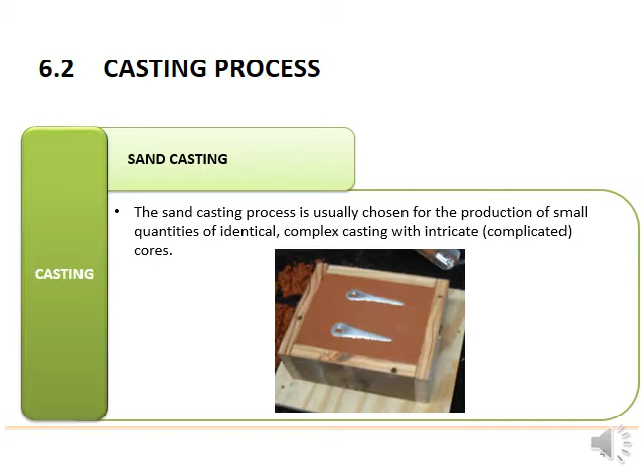Okay, untuk sand casting, the casting process is usually chosen for the production of small quantities of identical complex casting with intricate. So, maksudnya produk yang kita hasilkan biasanya identical and then sangat complicated.

Okay, sand casting, a mold is made by compressing the casting sand, and then casting sand is made from the combination of silica and bentonite.

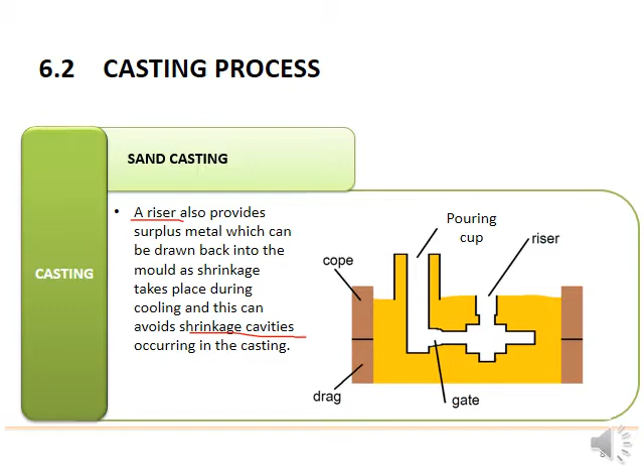Okay, the pattern has to be made oversized to allow for shrinkage of metal as it cools and it has called the shrinkage allowance. Ni yang saya katakan tadi.

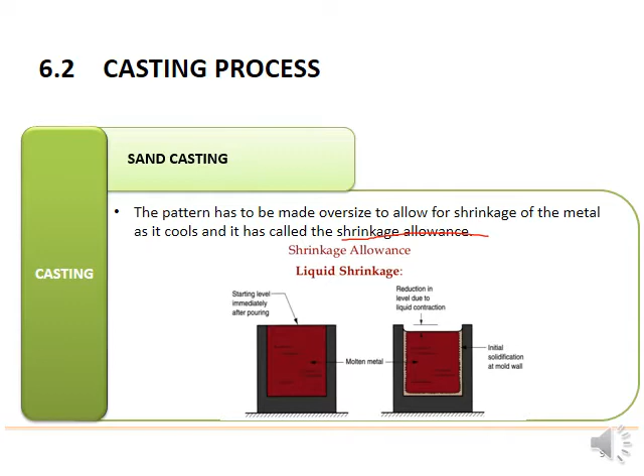Okay, first of all, on a clean floor, we will set the inverted drag box. Then we will place the pattern inside the box and pour the sand into the box. After that, sand is rammed and leveled off.

The packed drag box is then turned over and cope box is placed over it. After that, second half of the pattern is placed exactly over the first half of pattern. Then the sand is filled and rammed tightly. Now two boxes are opened and pattern is removed with the help of screws.

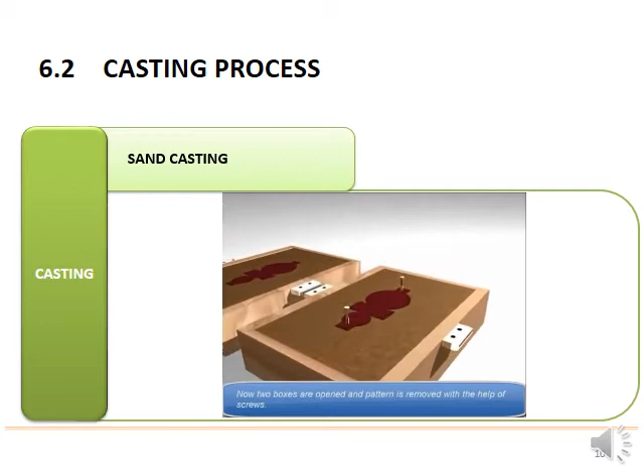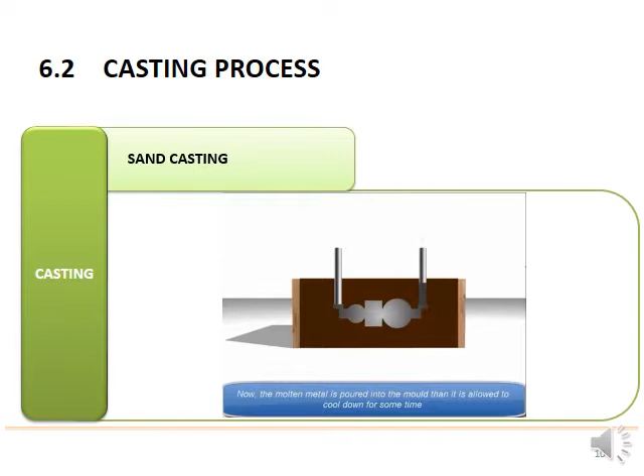Boxes are again put back into position and clamped with the rivets to prevent upper box floating. Gates and sprues are formed to pour the metal. Now the molten metal is poured into the mold. Then it is allowed to cool down for some time. After cooling, the final cast is

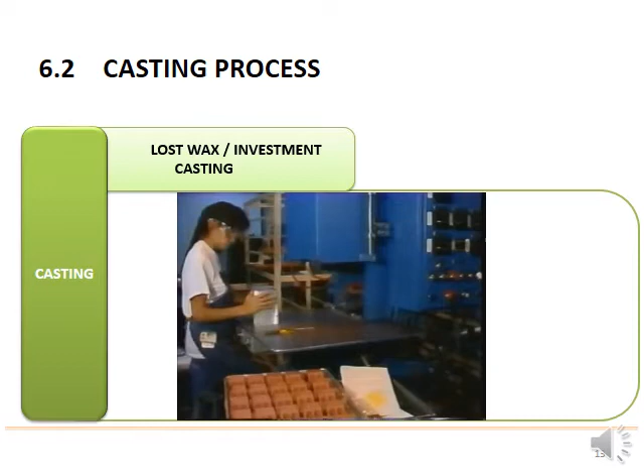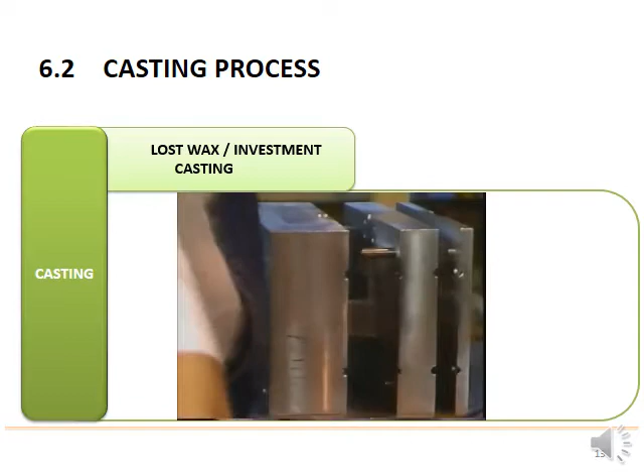To begin the process, wax patterns are made by injecting molten wax into an aluminum die to make an exact replica of the part. Wax injection presses make larger, high volume and more complex parts feasible. Laser technology and plastic patterns are an attractive alternative for some investment casting applications. In the next step of the process, the patterns are assembled with great care on a post or sprue, which is in turn fastened to a pouring cup.

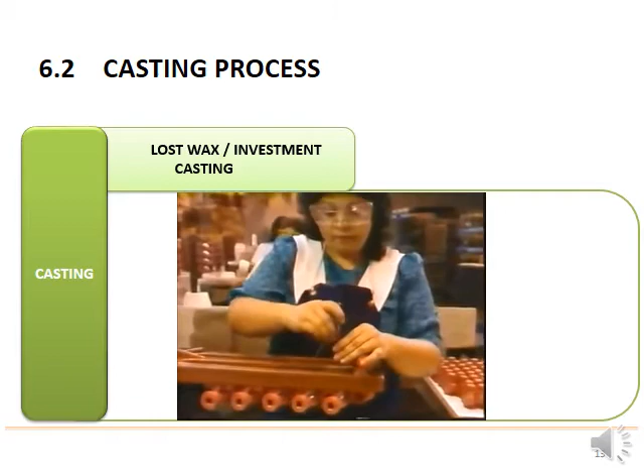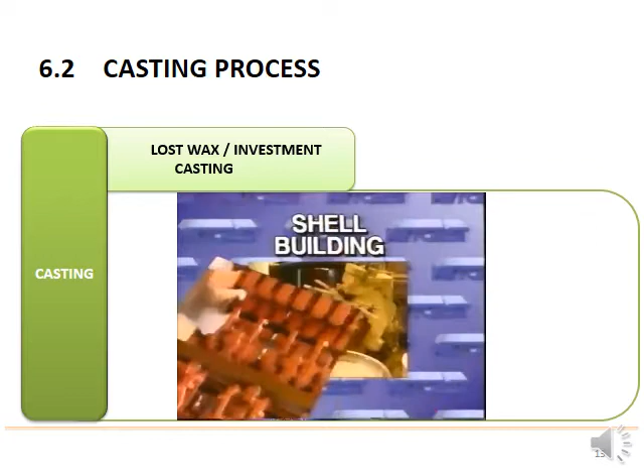Attention to detail is critical if the molten metal is to find its way into each detail of the mold. Assembly room temperature and humidity are carefully controlled to guarantee that the pattern retains dimensional stability. Complex runner systems are required in many cases to provide the gating or metal flow channels in the mold. The completed assembly is then processed to produce a ceramic shell mold. This is accomplished in several stages.

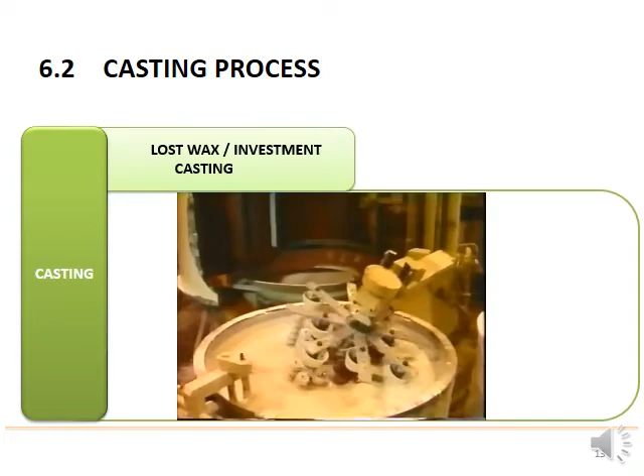First, the wax assembly is dipped into a cleaning or etch bath and then pre-wet before it is dipped into the first coating of slurry. This is a critical step in the process, for the operator must produce an almost flawless coating upon which to build the shell. The assembly is carefully examined and any bubbles in the coating are burst with an airstream.

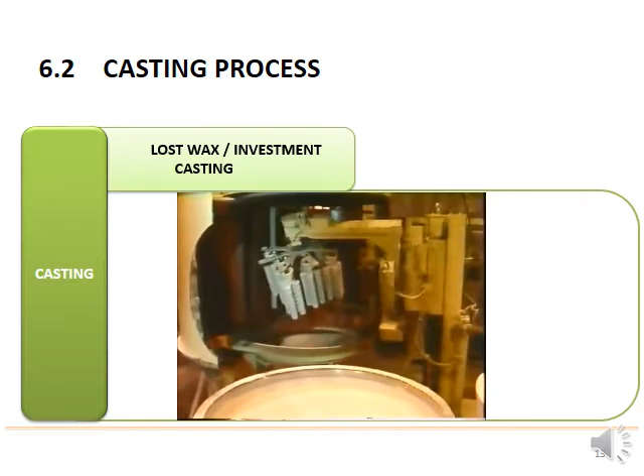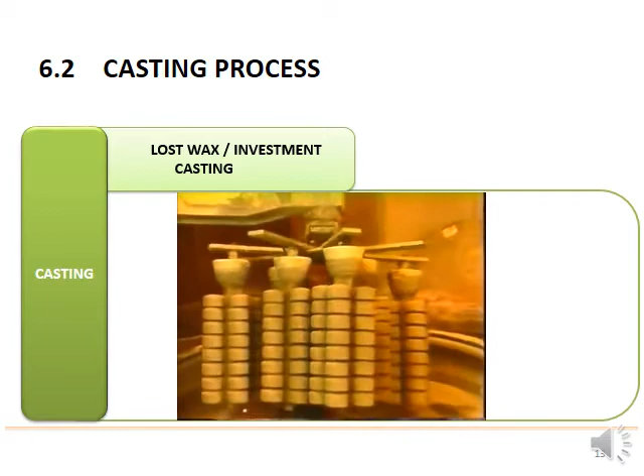The wet assembly is then inserted into either a fluidized sand bed or a rainfall sander, where the sand particles adhere to the wet surface. Care must be taken to make sure that every detail of the assembly has been properly coated. The assembly is then placed on a rack to be dried under carefully controlled conditions. Additional coats of progressively coarser grades of material are then applied to the assembly. Finally, the desired shell thickness is achieved.

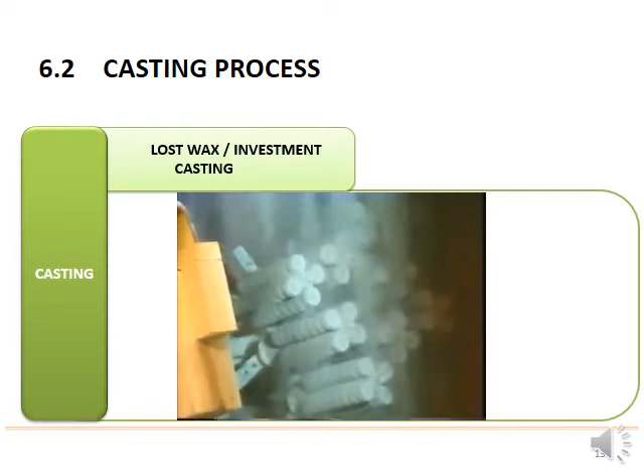The shell production process lends itself very well to automation. Robots have been developed to carry out the shell build-up sequences. Such equipment is programmed to follow the normal hand-dipping procedures to reduce labor costs and to remove variables of a manual operation.

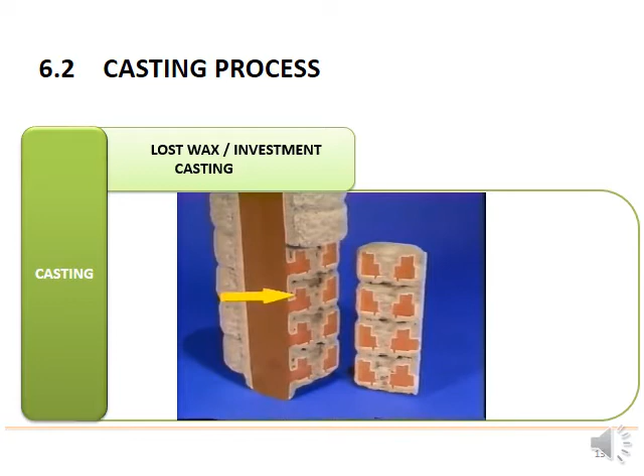If we take a typical assembly and section it, we can see how the ceramic coating faithfully follows the contours of the wax patterns. And when the wax is melted out, a precise cavity remains into which metal may be poured. The next step in the casting process is to remove the wax and fill the mold with hot metal.

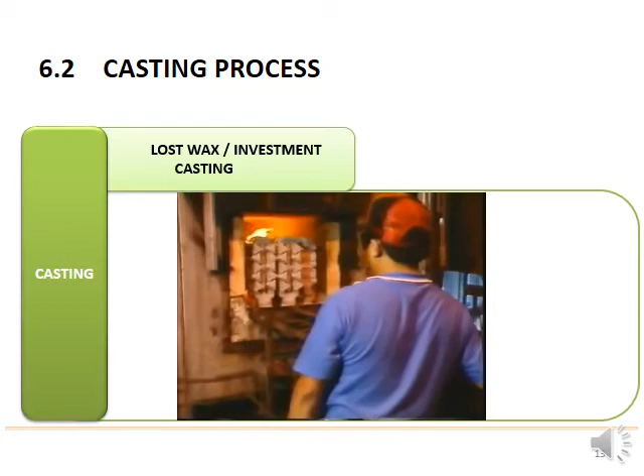The removal of the wax is usually a two-step process. First, the major portion of the wax is removed in a steam autoclave. Next, the shell is placed into an oven where the last remaining wax is burned out and the ceramic shell fired. The metal, which has been melted in an induction furnace, is poured into a transfer ladle. It is then poured into the preheated shells and allowed to cool.

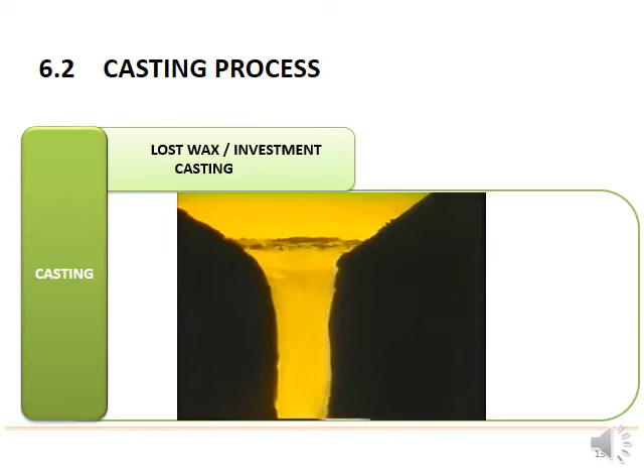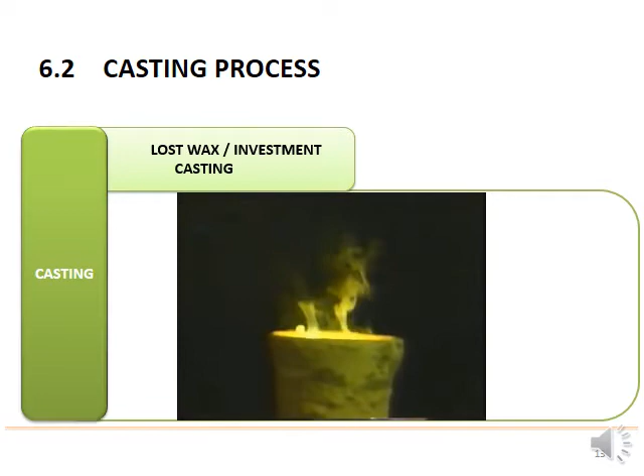Different types and sizes of ladles are used, depending upon the size of the part to be cast and the alloy being poured. In some cases, the shells are placed into fluidized sand beds for pouring. Light alloys are generally handled quite differently. When the metal has reached the right temperature, substantially lower than in the case of ferrous metals, it is usually placed in a special chamber and poured in a vacuum.

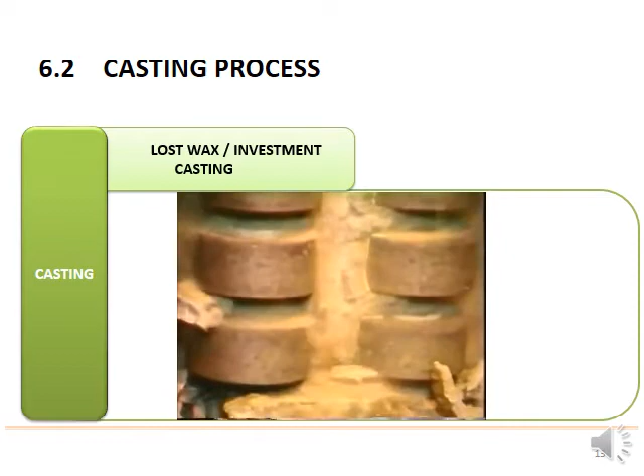The last stage of the process is to remove the shell from the newly formed cast. After the molten metal is cooled, the ceramic shell is removed either by vibratory methods or with high-pressure water jets. In some cases, the remaining shell material is removed in a blasting cabinet, with the resulting casting assembly looking exactly like the wax assembly previously seen.

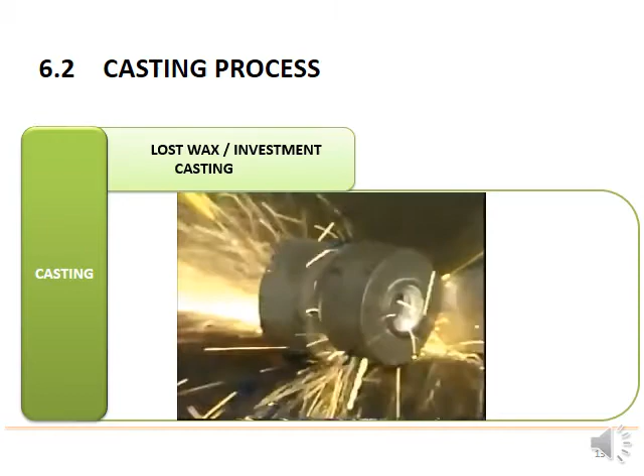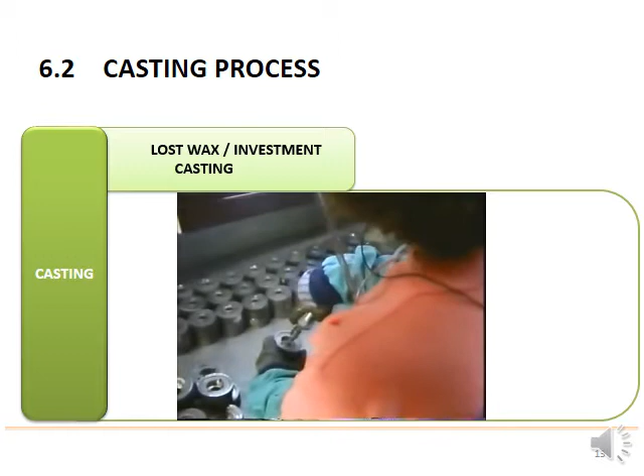The individual castings are removed from the assembly through the use of high-speed cutoff wheels and then cleaned in a salt bath. The gates are removed by grinding, and final cleaning is done in a variety of finishing machines. A minimum amount of hand finishing is required when parts are properly cast.

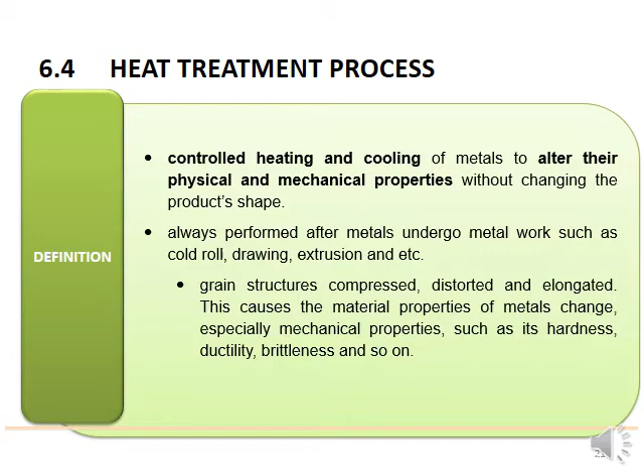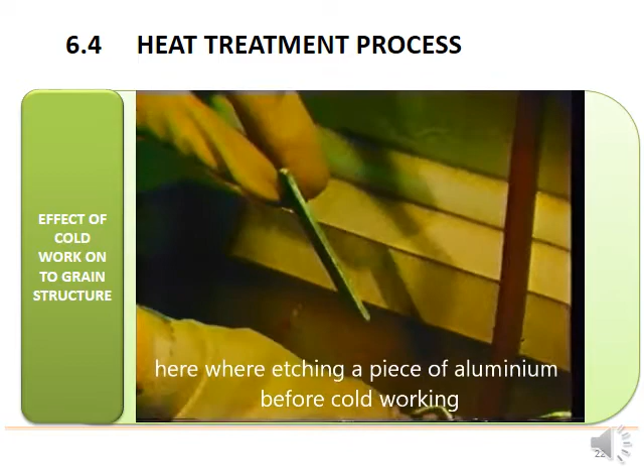Here we're etching a piece of aluminium before cold working. At this stage, the grains are all approximately the same size and the same shape. Remember, they appear different shades only because of the way they reflect the light.

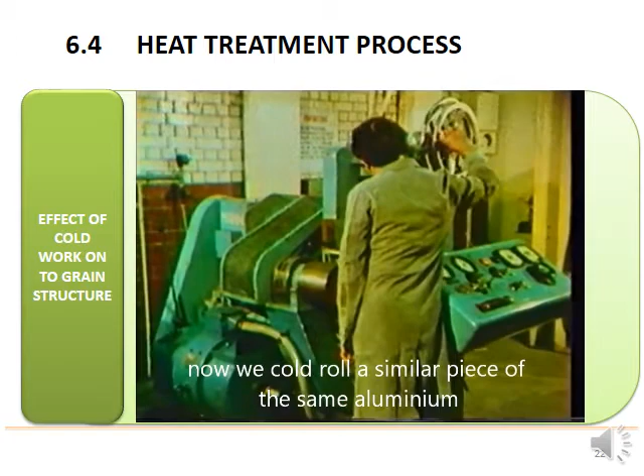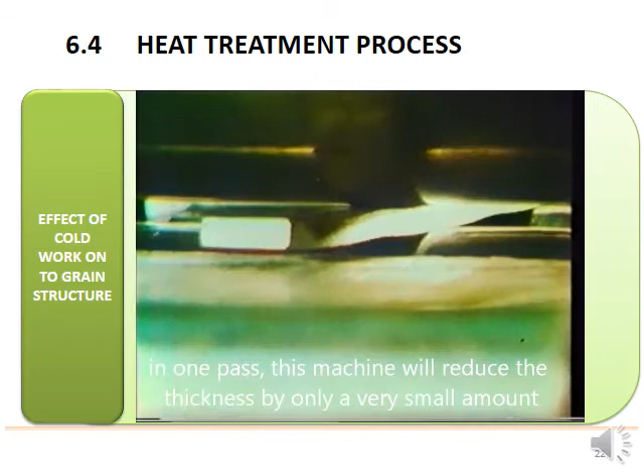Now we'll cold roll a similar piece of the same aluminium. In one pass, this machine will reduce the thickness by only a very small amount. So we'll reduce the gap between the rollers and put the metal through again.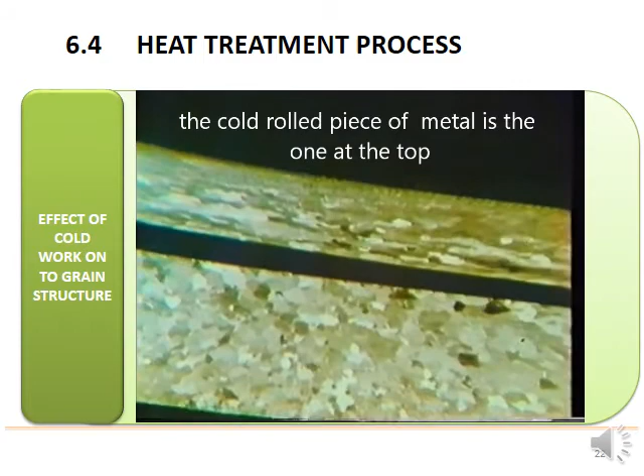Right, let's see what that's done to the grain structure. The cold rolled piece of metal is the one at the top. Can you see the difference? We seem to have changed the shape of the grains - they've become elongated.

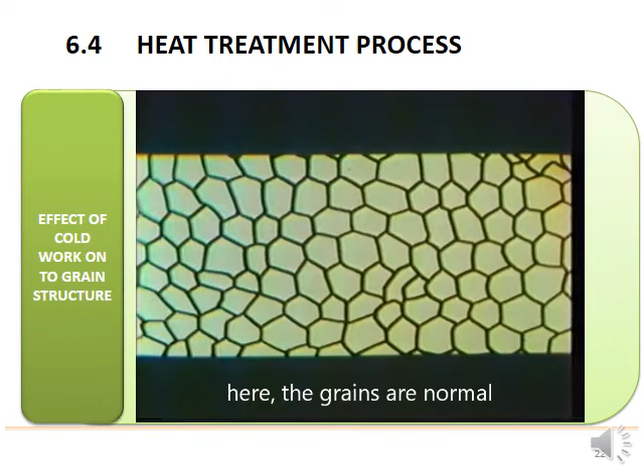We can get a better idea of what's happened in a diagram. First, we'll look at the grain structure of the metal before it's deformed - here, the grains are normal. But as the metal is squashed between the rollers, you can see the grains become elongated and distorted in the direction of rolling.

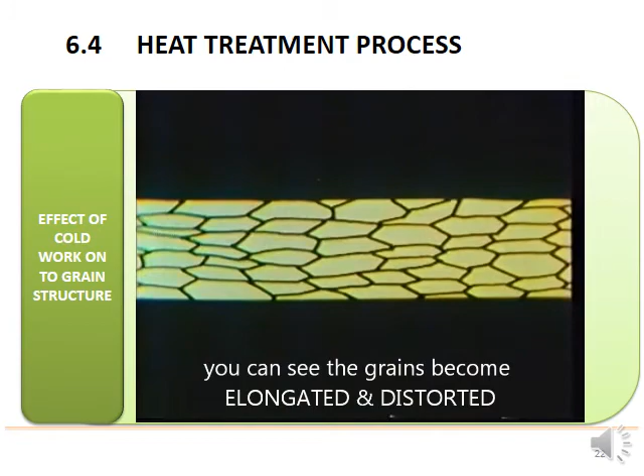The change in grain structure that results from cold working is accompanied by a change in the mechanical properties of the metal. Its hardness and tensile strength increase, while the ductility decreases.

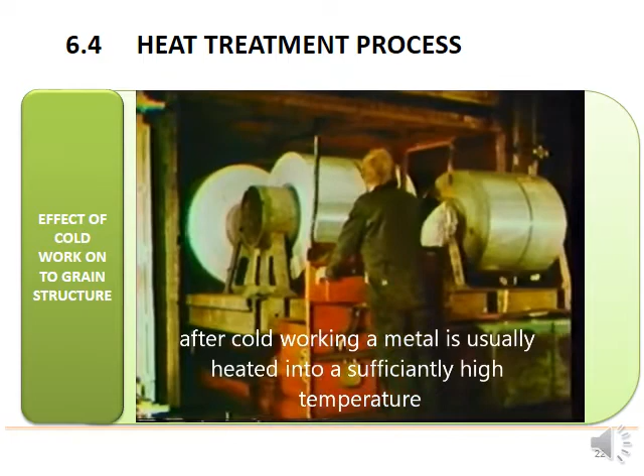After cold working a metal, it's usually heated to a sufficiently high temperature. Let's see what effect heating has on the distorted grain structure. In the case of this particular metal, nothing happens until the temperature reaches about 350 degrees centigrade.

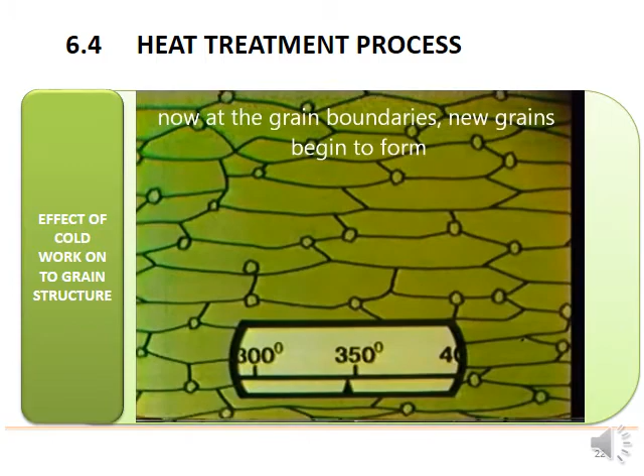Now, at the grain boundaries, new grains begin to form. These grow rapidly until a new, undistorted grain structure completely replaces the old, distorted one. We call this process recrystallization.

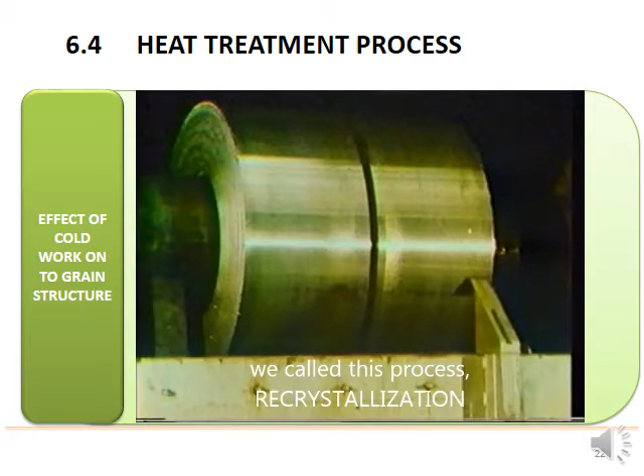What is the use of this heat treatment process? First, to restore or improve mechanical properties. So after the metal has gone through cold working, extrusion, and so on, we want to improve its mechanical properties. Second, to improve machinability and refine grain size.

Okay, grain size that is coarse, we want to make it smaller again, and also to relieve the stress of the metal induced during cold or hot working.

So when we do metal forming processes, sand casting, die casting, there will be stress. So we want to relieve the internal stress in our product, and to improve mechanical properties such as tensile strength, hardness, ductility, shock resistance, resistance to corrosion, and so on.

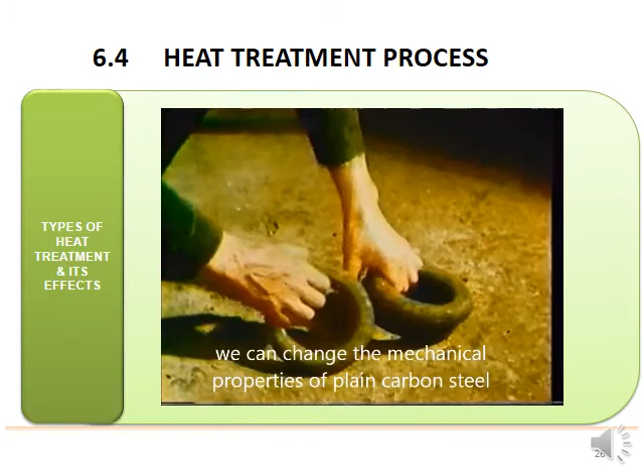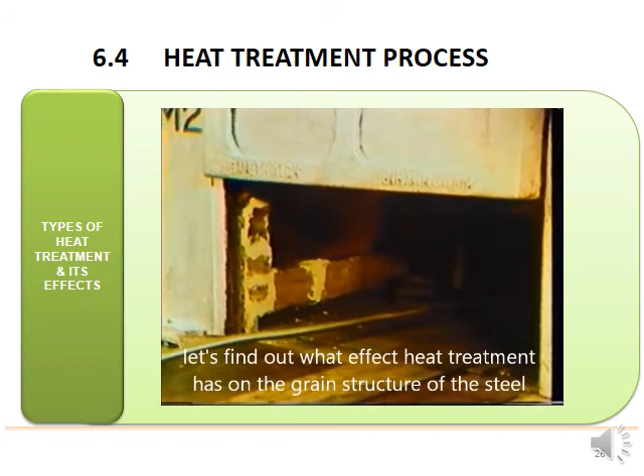Now we can change the mechanical properties of plain carbon steel by a carefully controlled sequence of heating and cooling by heat treatment. Let's find out what effect heat treatment has on the grain structure of the steel. The rings we're treating contain 0.8% carbon, so all the grains are of the same type, pearlite. Nothing happens until the temperature reaches about 720 degrees centigrade. Now at the grain boundaries, new grains begin to grow. These new grains are quite different to the original ones, and they grow until they completely take over the old structure. Here we're normalizing, so the components are taken out of the furnace and left to cool in air.

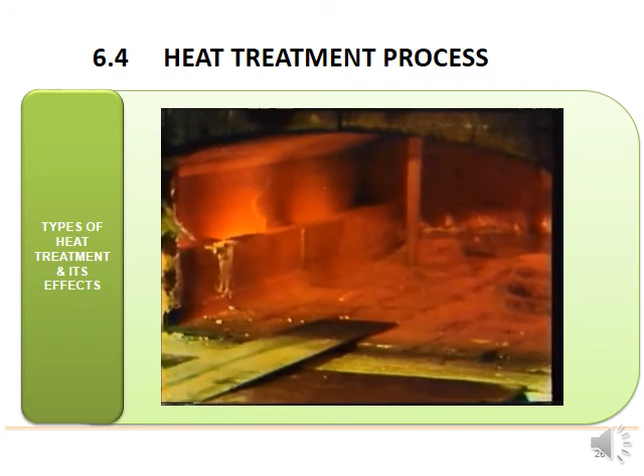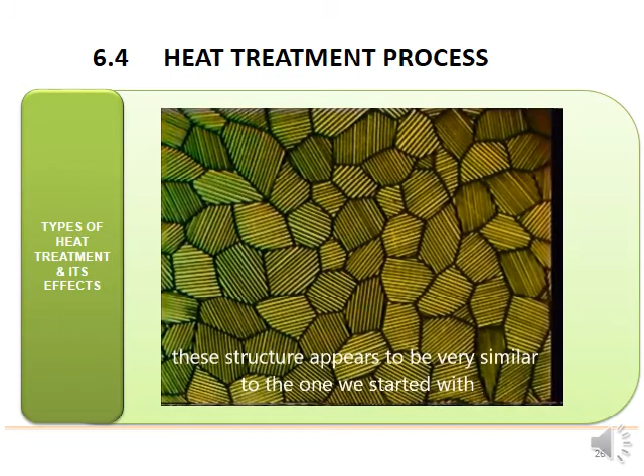Let's see what happens to the grain structure. As the temperature reaches about 720 degrees centigrade, the old type of grains begin to reappear. These grow until they meet their neighbors. This structure appears to be very similar to the one we started with. But if we compare the two, we find we've reduced the size of the grains and made them more uniform. We've also changed the properties of the steel. Here's a similar piece of untreated steel.

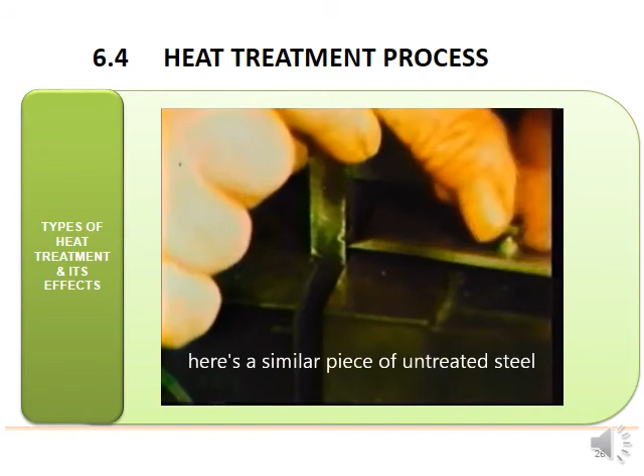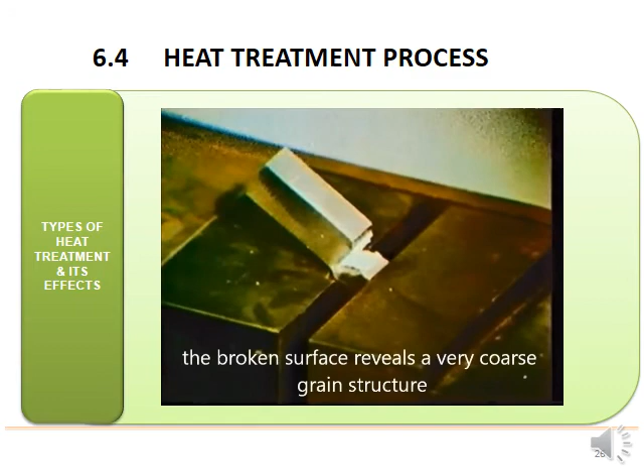Let's see how tough it is. Remember, toughness is its resistance to shock loading or impact. About 60 units. The broken surface reveals a very coarse grain structure. Now we can see the same fine steel that's been heated to a high temperature and left to cool in air. About 100 units. It's much tougher. This time the broken surface reveals a much finer grain structure.

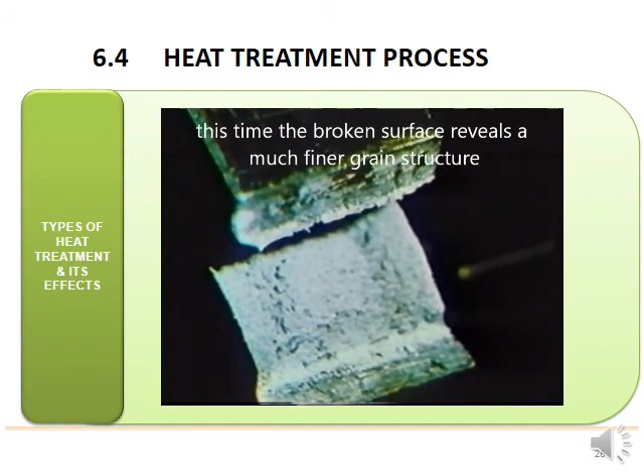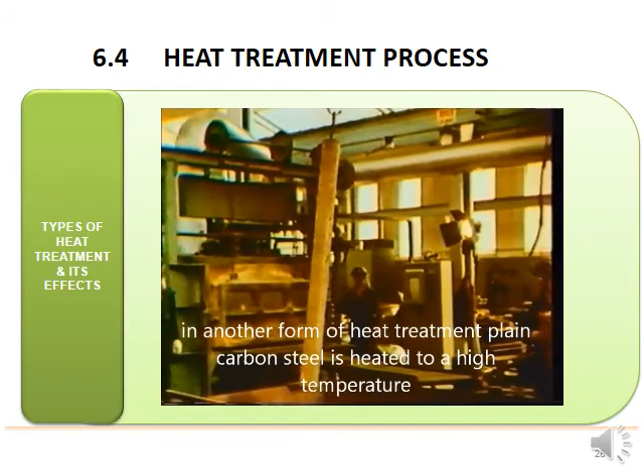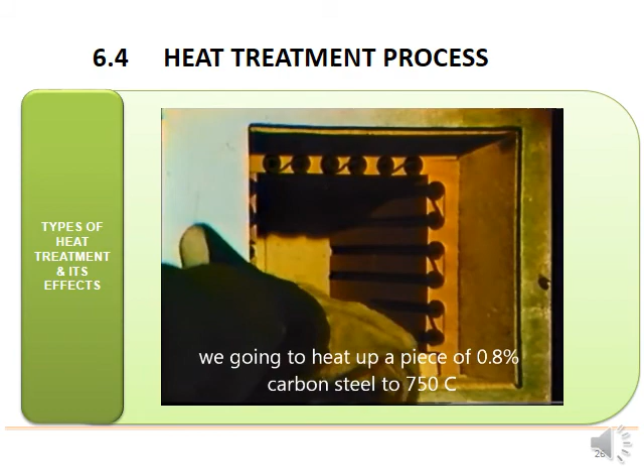In another form of heat treatment, plain carbon steel is heated to a high temperature and is then cooled rapidly or quenched in water. This treatment increases the hardness of the steel. Let's find out what it does to the grain structure. We're going to heat up a piece of 0.8% carbon steel to 750 degrees centigrade. Remember, with this particular amount of carbon, we have only one type of grain.

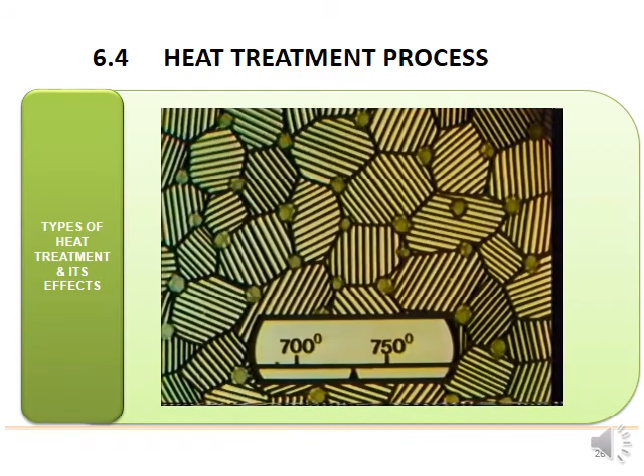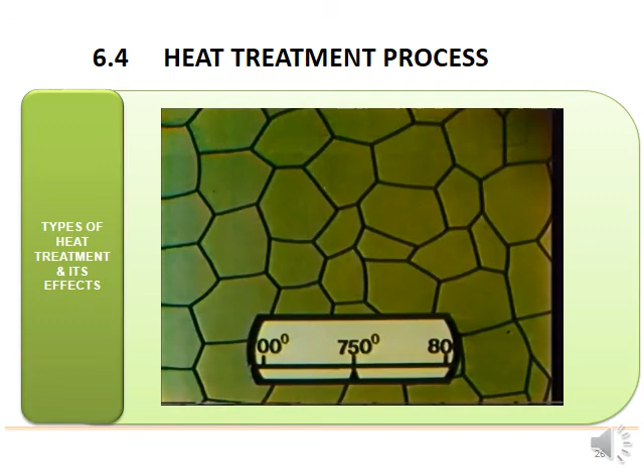Nothing happens until the temperature reaches about 720 degrees. Now, exactly the same thing happens here as it did in normalizing. New grains of a completely different structure grow out at the old grain boundaries. Right, now for the quench. As the temperature falls, in each new grain, a needle-like structure forms. This structure is very hard indeed. It's also brittle.

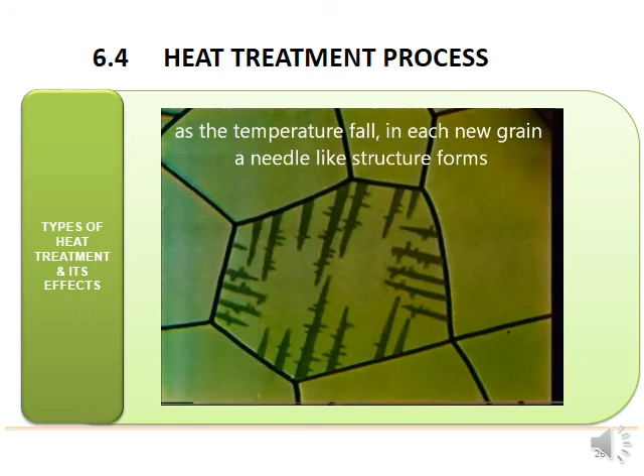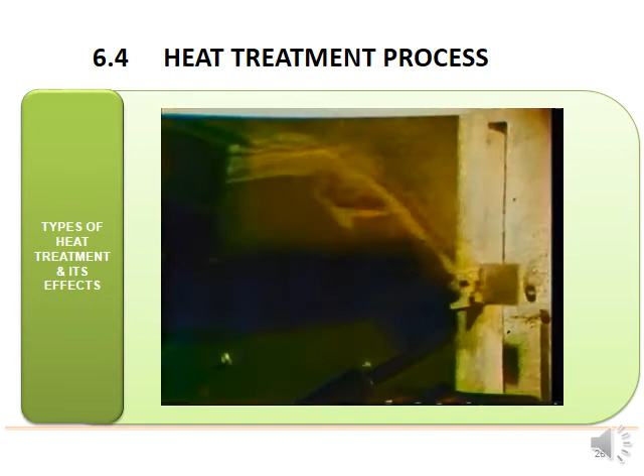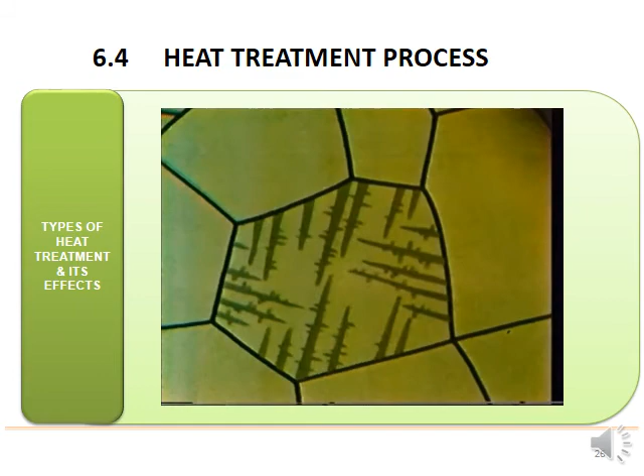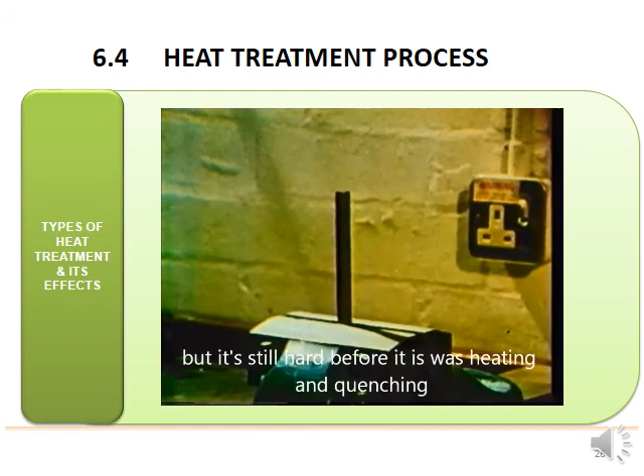We can relieve the brittleness by tempering. In this case, we're going to temper at about 500 degrees centigrade. Tempering modifies the structure of the needles. Inside each needle, small flakes of carbon begin to appear. Now the steel is much less brittle, but it's still harder than it was before heating and quenching. So far, we've only looked at the heat treatment of 0.8% carbon steel.